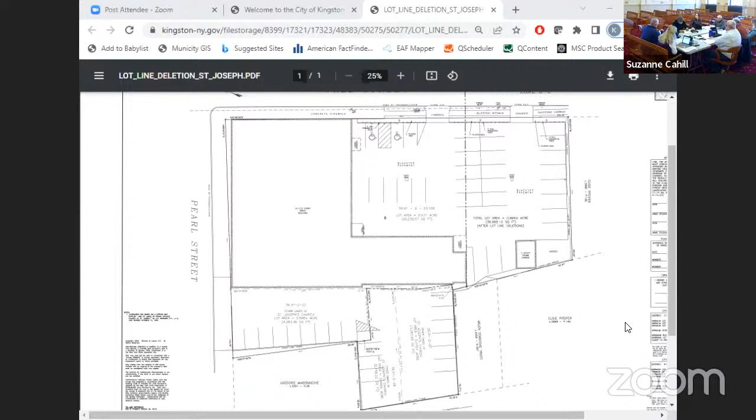All right, so under SEQR, this is a type 2 action, so no further review of the board is required. You've already been advised you got to provide copies plus the Mylar copy that has to be signed, right? Right. Anything else? That's it. Okay.

So, board policy 6 will be on it. Yes. So at this time, I'll make a motion that we approve item number 2 with board policy 6 and all of the copies and written descriptions submitted to staff. Second on that? Second by Chuck Palaco. All in favor? Aye. Aye. Opposed? Carried. Thank you, easy.

All right, thank you. Good seeing you again. It took you longer to get here, Phil. Well, I'll be back one more time.

In care of Centerline Communications is the applicant. Central Hudson is the owner of the pole. Anybody, we're going to introduce yourself? Kimberly from Centerline. So is anybody besides the applicant here to speak on item number 3? Can you just state your last name, please?

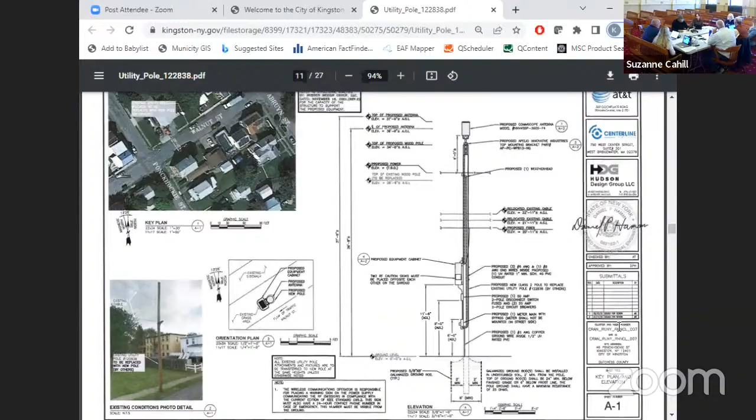Now, this says for AT&T - is this for all the cell phones, Verizon, all of them, or just AT&T? Just AT&T customers, correct. They just put one up on Delaware Avenue on the hill for Verizon, I believe. The main infrastructure of the towers is complete - it's now filling in the gaps or creating satisfying areas that are having high demand for data.

And that's where we're incorporating the small cell technology, which is just the small antennas to handle the offloading of data off the main antenna systems. And that's the pole they just put up a couple...

So it basically consists of a small antenna that sits on top of the utility pole. Then there's a small box, shown in the simulations, which takes care of the radios. Each small cell has a disconnect, so if utility work happens or the pole is hit, the cell signal can be turned off by anyone at the site. It's mounted at an appropriate height to not affect the surrounding community.

Any other questions from the board? We did provide simulations so the community can get used to what these look like when they start to see them.

So this is a short environmental assessment. It's just unlisted, we gotta do one. Yeah, I haven't had one of these in a while. We'll blow the dust off of this.

Under SEQR, this is an unlisted action, so we have a short environmental assessment form before us that is in order. At this time, I'll make a motion that we approve it. Do I have a second? Second by Emily Hamilton. We're gonna do a roll call.

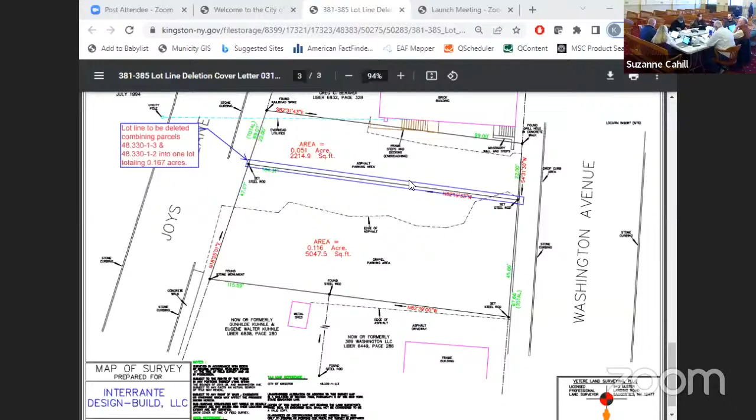At this time, I'll make a motion that we approve item number 5 with board policy 6 applied, and also the written descriptions and the appropriate amount of paper copies and Mylar copy to be submitted to staff. Second on that? Hamilton with a second. All in favor? Aye. Opposed? Carried.

You want to just, for item number 7? Yeah, I was wondering, I was gonna ask them. So we jumped to 7? That's an option. I'm sure that is 690? I don't think they're here yet. Okay, Jimmy Buff and Crystal Force, we'll keep you here. Right, that's good.

The folks from item number 6 are not here, the applicants. Is there anybody who wants to speak on item number 6 during the public hearing? It's number 693 Broadway. Okay, we're going to come back to that when they do arrive. I don't know if anyone was here for that.

Okay, moving into new business. Item number 7 is 381 and 385 Washington Avenue. It's a site plan for construction of a 6,768 square foot commercial building. Section block and lot is 48.330-1-3 and 2. SEQR determination, Zone C2, Ward 1. Interrante Development Group LLC is the applicant, 389 Washington LLC is the owner. Let the record show that Luke Interrante is here again.

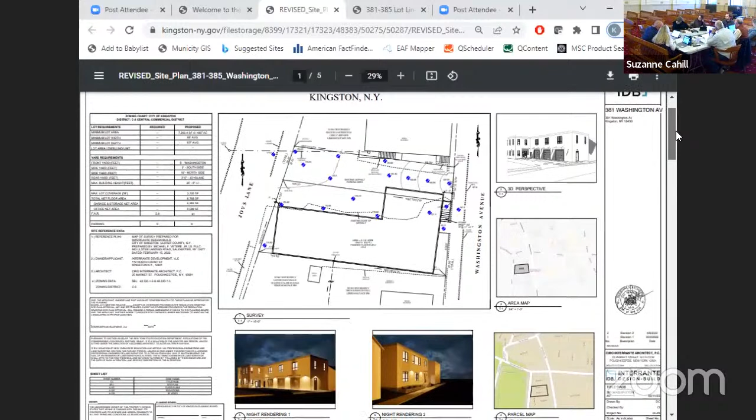Since the last meeting, we've done a few light updates to the plans, showing spot elevation and grading. We revised the signage, so we moved the no exit sign further to the west, so it's visible before somebody reaches Washington Avenue. We've added a no entry sign facing Washington Avenue along with some arrows on the pavement depicting that. Added street trees to the Joy's Lane side, two river birch in lieu of the boxwoods that were previously shown.

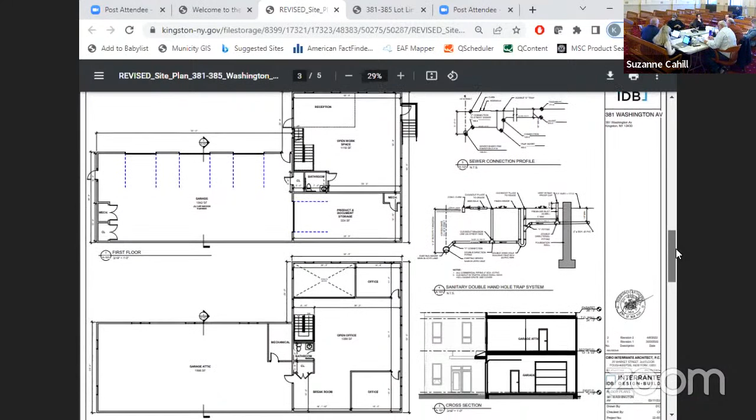Additional sewer connection and details to the site plan, stormwater calculations, and infrastructure to manage the stormwater was submitted to the city. John Schultes, the engineer, we don't have any comments back on that yet. I believe he's still reviewing it. And then most recently, we received the recommendation letter from the Ulster County Planning Board, providing a response earlier today that just outlines that we're in agreement basically with all of it.

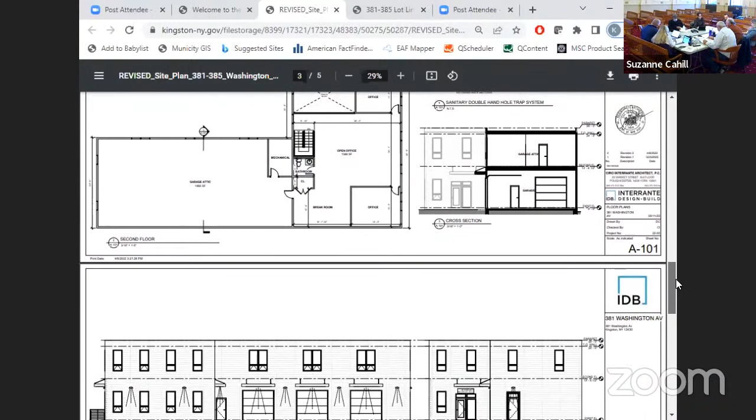We had some lighting spec for the wall packs we submitted with that response letter, and we're working on the photometric plan with a design lighting consultant, so we'll get that over. Some signage has been detailed. Sustainability was sort of the biggest item, so we'll make provisions for EV charging stations. We are changing the plan to go from all natural gas powered heating equipment to air source heat pumps on the office side, and then radiant natural gas tube heating in the garage area.

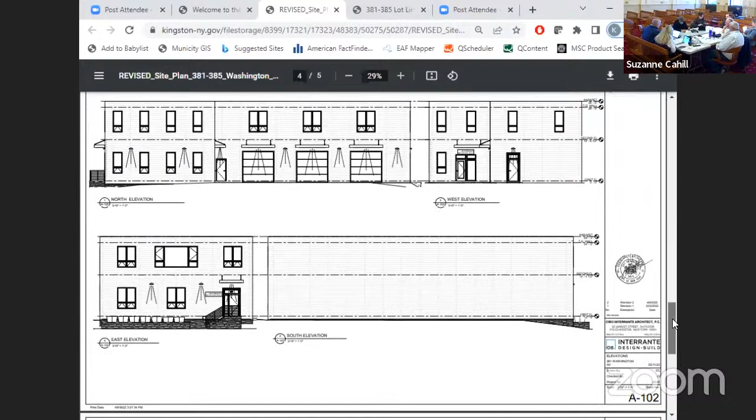Before we go into the few items that the county has identified for required modifications, can you just go over the traffic pattern again on ingress and egress? Yeah, so basically Joy's Lane entrance will be in and out. So if you look at SP1, you can see the two arrows indicating entry and exit on the Joy's Lane side right there. And then basically across from the handicap spot, we moved that signage, so there's an upright sign there letting folks know that there's no exit, that it's an entrance only off of Washington.

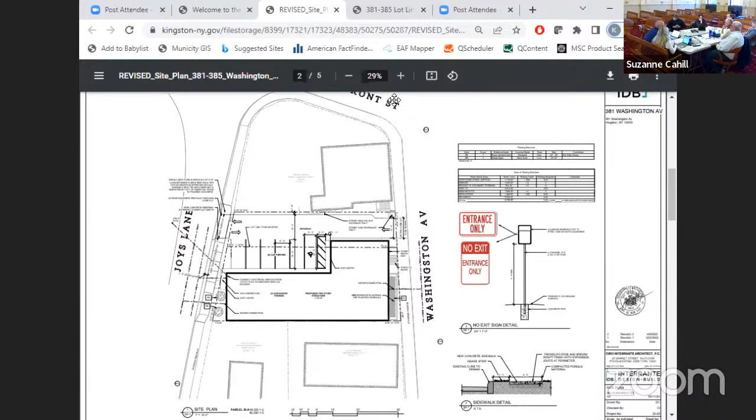Previously, that sign was closer to Washington Avenue, so the fear, Sue brought this up, was that somebody would already be driving down to Washington before they would see that sign. And then facing Washington Avenue, we have a no exit sign to let folks know that they can pull in and they don't have to wait to see if anybody's coming out, and also an arrow there showing that it's entrance only off Washington. So, same thing here too, so I'm not ignoring that. All right, so yeah, most of the traffic day to day will be in and out of Joys.

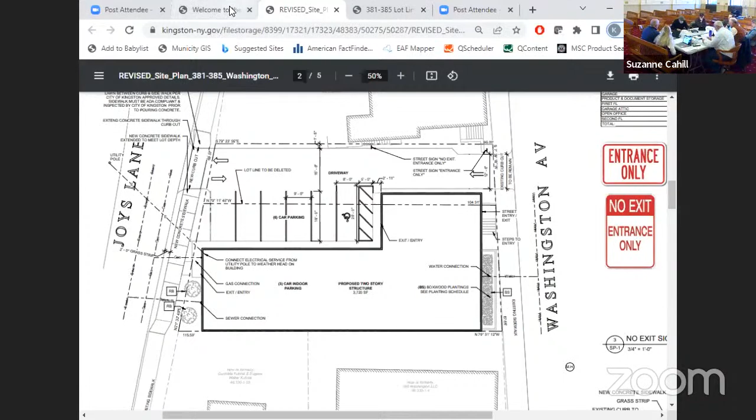All right, so some of the county responses here. The lighting, can you speak to that? Yeah, so the wall pack lighting, we identified wall packs on the elevation drawings already, although they weren't spec'd out. So that's the fixture that we're proposing to use, and our lighting consultant is working on a photometric. The county did give guidelines for that, so we're gonna make sure that we followed them.

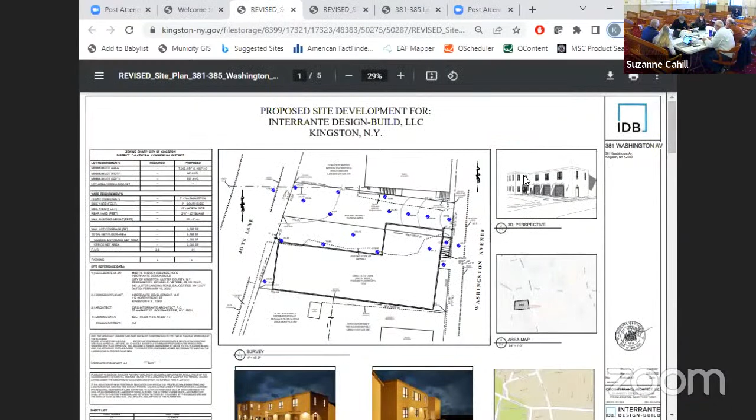Signage details were submitted. I'm just going by item by item here. Next page, there you go. Yep, I was also talking about the signage.

And sustainability, they brought up EV charging stations and wanting to have the infrastructure for those. So what we're going to do is basically rough those in to be built and mounted from the parking spots, so they can easily be added without having to redo anything. And those will be open to the public? Yes, standard. Those have been met.

Refuse removal? We don't expect to generate a lot of waste, so we plan to use the city receptacles. And does it come out to Washington on that side, or does that matter? I don't know where they pick up. Put it on Joys Lane side.

Yeah, we would use the Joys Lane side. Okay, schedule, yeah. So we got to take a vote. The only other concern that I had, Luke, was when I was thinking about it, the proximity to Washington Avenue with the construction. You may end up having to close off that sidewalk area during construction, so that will require a DPW permit.

So I would recommend strongly that you do some pre-survey of the existing conditions of the sidewalk, because if it gets damaged, you will be responsible for the repair and restoration. Understood. Yeah, it's actually a new section of sidewalk across the property on Washington Avenue. We're hoping to make our utility connections on Joys Lane, so we'll have minimal disturbance on Washington Avenue, but we are aware that we have to.

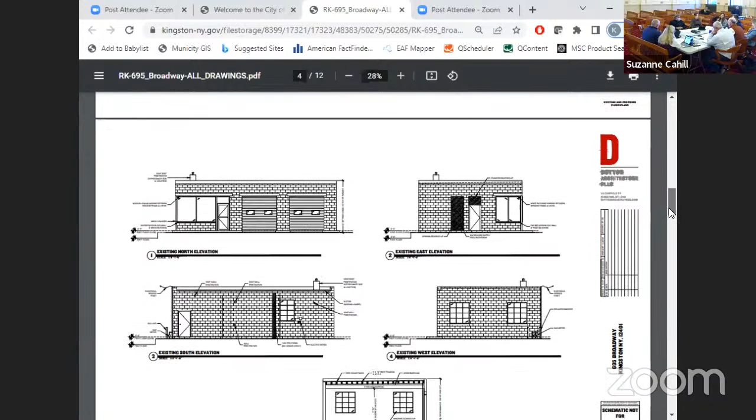Asia, maybe you just want to talk a little bit about the landscaping component in the front, because it's quite an extensive landscape plan for Broadway. It's unusual, a little different. Well, we're just hoping to make the community feel really welcome, be able to come in and use the space and have it really be an extension of the streets. We're going to be using sidewalks that match the Unilock that you've done on Broadway already.

So that it feels very cohesive with the city. It's a primarily native style planting, and we're trying to add some green space and help with more drainage in the city. There'll be a lot of permeability.

But the idea, just to explain to the board, is for it to be an area where people can sit and basically enjoy maybe music. It's a small event type space, open to the public, kind of a quasi-public space. Yes, and it's privately owned.

Anybody else need to see this? It's not much different than what was originally proposed, it's just now around the different design of the building a little bit.

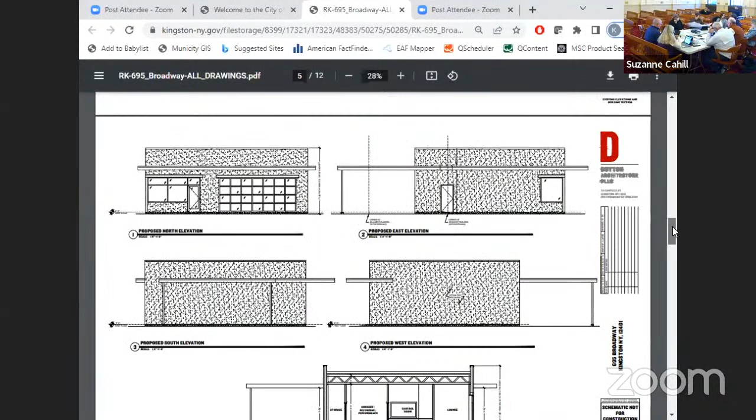Is there going to be any solar on site at all? There already is, both on 693 and on the annex building behind it.

Fruit trees, they'll be open for the public to come and pick the fruit, the raspberry and the peach, and blueberries along the front. Absolutely, great food.

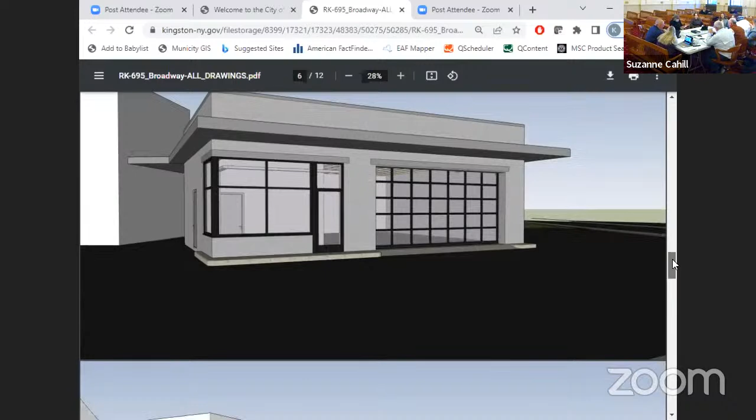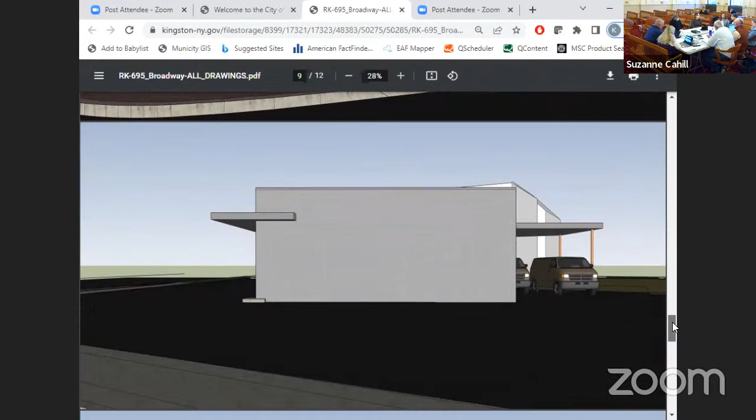Is it going to be offered to the public? There may be speakers, there may be presentations, it might be used for another organization to host a meeting. It's designed to be that.

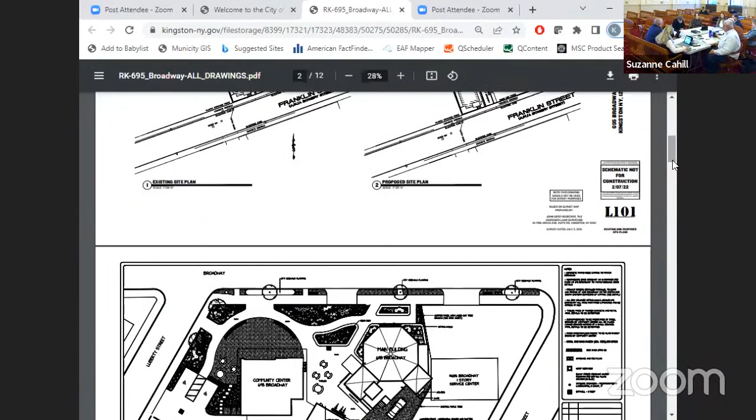Has the generator already been installed? Yeah, it kept us moving during the storm. Any problem with noise washing over to the neighbors at all? No complaints, no. It's remarkably quiet for the size that it is, the generator.

And refuse and recycling, where's that going to be stored? It's currently stored behind 693 to the lower right, behind that building where the driveway and the car are, and we wheel it out every Tuesday morning. So you do have a spot for it. Yep. So I guess no dumpster, right, you're just wheeling that stuff out. Yeah.

So did they already have a term with the previous submission? I don't know, but I think we'll just discuss it since this is new construction. We're going to talk about the term for the special permit. We'll see how the board feels, but typically we set a year for the first term, see how things go when construction's all done, and come back for renewal if everything's good, which I'm sure it will be.

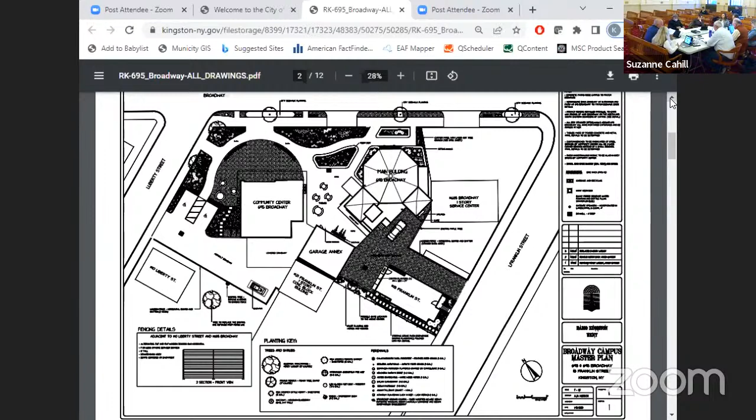So this is type 2, huh? Yep, under SEQR. So because of the square footage, no further review of the board is required for that. At this time, I'll make a motion that we approve item number 6 for a period of one year with board policies 4, 4A, 6, 10, 11, 14, 19, 23, 25, and 26. And what's this one here? That's if they do hold special events, they need to get special permits for the noise. If you have special events there, you're going to have to secure a noise permit from the planning office.

So that's all on the motion. Do I have a second? A second by Kevin Roach. All in favor? Aye. Opposed? Carried. Thank you, folks, thank you.

All right, item number 4, they're still not here.

Okay, item number 8 is 86 Smith Avenue, site plan to install signage overhanging the public right of way. Section, block and lot is 48.82-1-8, SEQR determination, zone C3, Ward 5, Bethany Obrecht, correct? All right, is the applicant owner? Welcome, thank you very much for having me. Bethany is here.

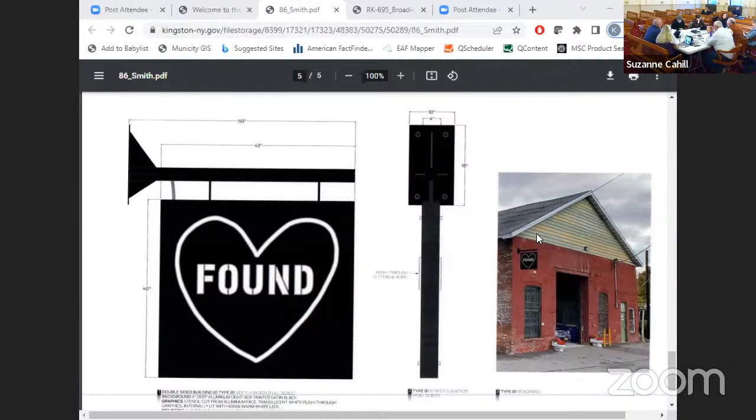All right, any other questions from the board? Under SEQR, this is a type 2 action, so no further review of the board is required. So at this time, I'll make a motion that we approve item number 8 with board policy 6. Do I have a second? Second by Vince Archer. All in favor? Aye. Opposed? Carried. Good luck. Thank you, I appreciate it.

That is so good to be in person again, isn't it? I think it's easier. Yeah, I'm sorry.

All right, moving into old business. Is Dago here? No, he is not. Let's go. Item number 9 is 685 Broadway, special permit renewal for auto sales and repairs. Section block and lot is 56.92-3-21, SEQR determination zone C2, Heritage area, Broadway overlay district, Ward 4. Dago A. Maratz is the applicant owner. Mr. Maratz is not here.

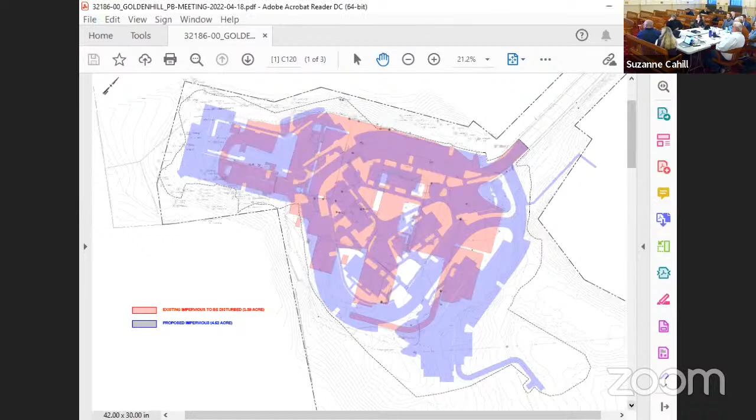So if you go to the next figure, we broke the site down into 6 different design points, keeping the existing design points the same as proposed of where water currently flows and where it's going to continue.

We'll start with design point 1, to the north towards the nursing home. Our design point is an existing catch basin located near the rear parking of the nursing home. Water from the jail currently gets there via an existing drainage manhole at the edge of the parking, so the jail and majority of the parking goes to that catch basin and down the hill towards the nursing home.

The nursing home has its own closed stormwater facility network that goes throughout its parking and continues in a sewer network down Gum Street. The green area, the senior building, the majority of the loop road, and the townhouses will connect to that existing structure on our site that continues down to the nursing home.

The townhouses in the center, we're going to capture the water from the roof and send it to stormwater planters, where it will be treated before going into the closed system. The senior building and roads will be captured through catch basins and the pipe network, treated with a hydrodynamic unit before going into that.

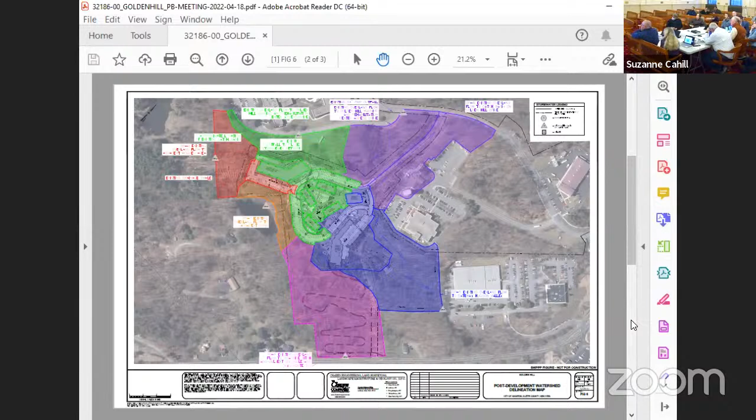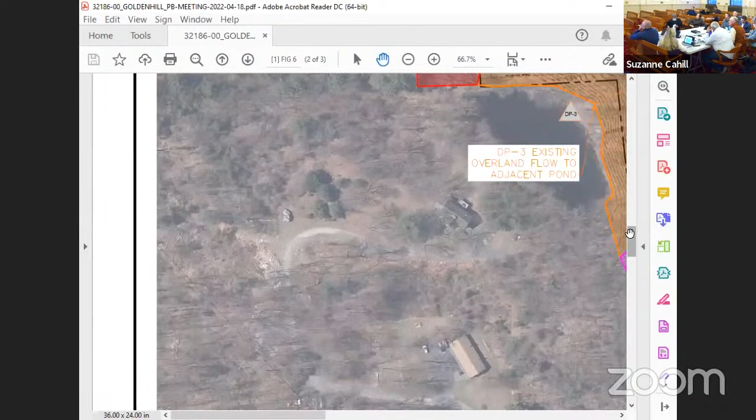So how would all of these systems handle it? The DEC requires us to examine the 1-year, 10-year, and 100-year events, and the city, as an MS4, requires us to also analyze the 25-year event. This is an excerpt from our SWPPP report, and for all sources, we reduce the flow rates.

That's a separate network. We're sending it to a closed network that flows through the parking lot of the nursing home and then continues down. The proposed system will actually be better than what exists.

Any questions about the stormwater? Okay.

You've done some borings - that's all been completed, right? We submitted a geotechnical report with the boring map for you guys, I believe, after the last meeting.

I don't know if you're prepared to answer the question - is blasting going to be needed up there? I can't say specifically at this point. What we can tell you is that we designed the site to limit the need for it. And if it is needed, we will follow the existing city ordinances and to the extent possible use mechanical demolition instead of blasting. That's what we can tell you at this point.

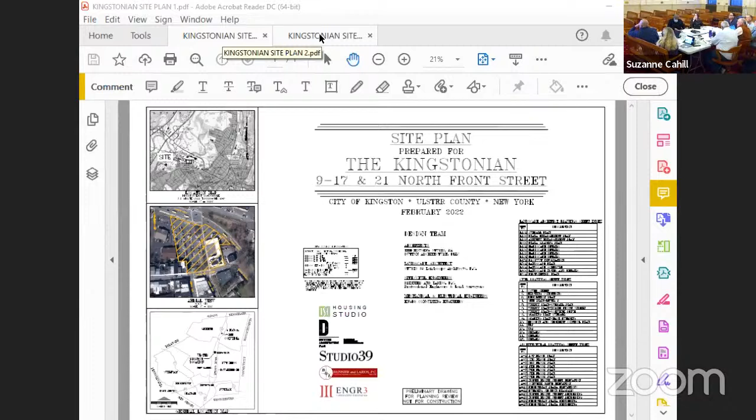And as you all know, it's substantially developed already, so this is redevelopment. Strong. Next one.

This is a rendering, I think it's the sheet in your drawing, of the project from the corner. It's around from the Senate House and the Senate garage, showing for now the Herzog warehouse, the masonry building. And this shows what I call the West Campus, which is the building over the parking garage and Montgomery real estate.

That's a version. This is the pedestrian plaza entrance, and that's the main West Campus building frontage along North Front Street. Over on this corner would be an entrance from the Wall Street and North Front Street intersection to the garage, entrance only. That's directly across from where it lines up right with Wall Street.

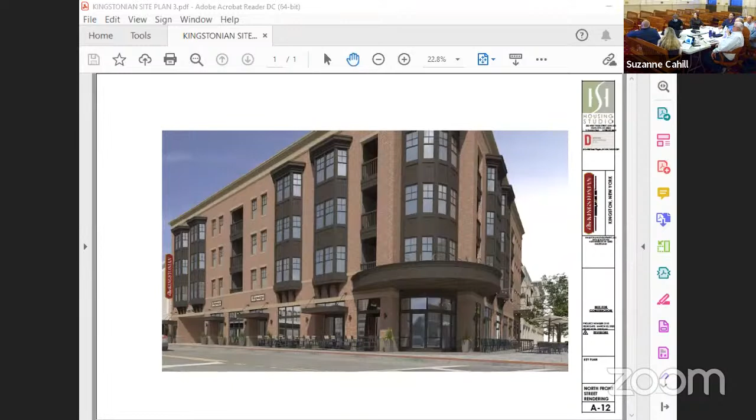It's slightly different from the garage entrance to the city garage. Yeah, that was offset a little.

This shows the elevation looking up North Front Street to the building, West Campus, East Campus. This is the hotel with ground floor space and a restaurant. This is retail space here and apartments above. These are the hotel rooms.

The applicant and the architectural team spent a lot of time with HLPC advancing these drawings based on public comment. We've actually, over the past...

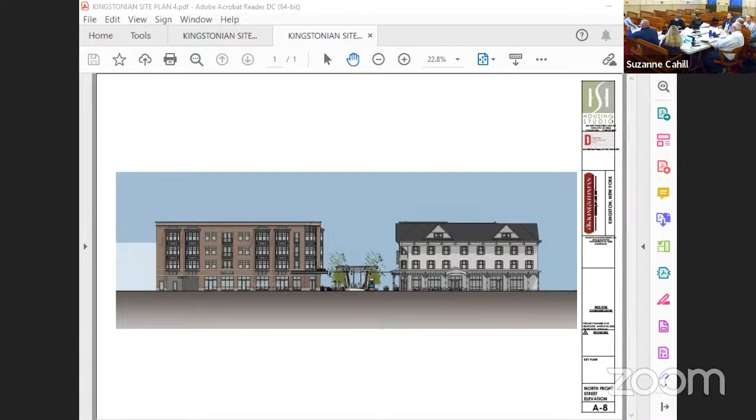Five is giving me an error message. Five is probably the next sheet. From Schwenk Drive, looking at the back, what we call the back of the project. So that's on your end. This is on my folder at six.

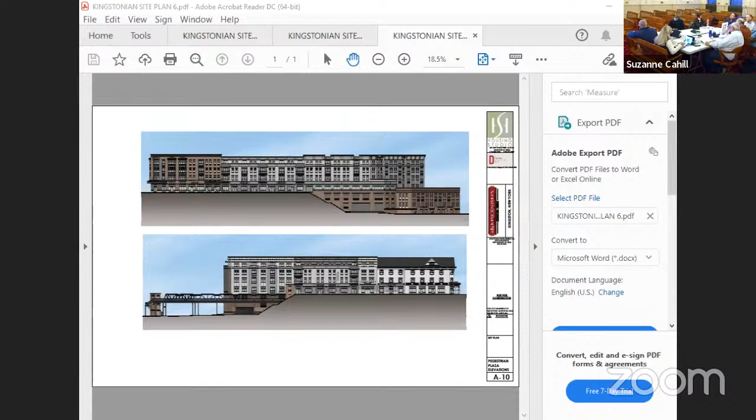And this is slices through basically the pedestrian area between east and west. This would be looking at the plaza view, looking at the elevation that faces the pedestrian plaza.

One addition, which I'll show you in plan view - one addition or enhancement was this project: the pedestrian plaza used to end at a retaining wall with a safety gate, so people could walk to the end of the pedestrian plaza, but that was it. So the new design team has introduced a grand stairway down to Schwenk Drive level.

So it could also be used for events. And that's presented in more detail on the landscape plan. So that's one project enhancement that's been made.

Also, even along the side of that, at the request of some bicycle enthusiasts, a runnel - a bicycle runnel has been added, so you can walk down the steps, roll your bicycle down the runnel, and get to the lower level.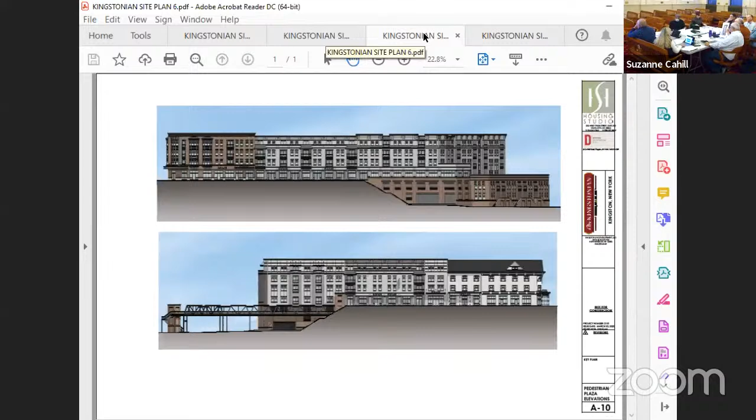Walking towards where the entrance to the pedestrian bridge would be. This is a part of the treatment of the pedestrian plaza. This is kind of the north end of the pedestrian plaza.

This shows the treatment of the buildings facing the plaza. Again, mostly retail space on the ground level and apartments above. And these give the more representation of what the colors are going to be. I know this, it's difficult to match the two up.

This is going to be - yes, really this is what was endorsed by the HLPC, the Historic Landmarks Preservation Commission.

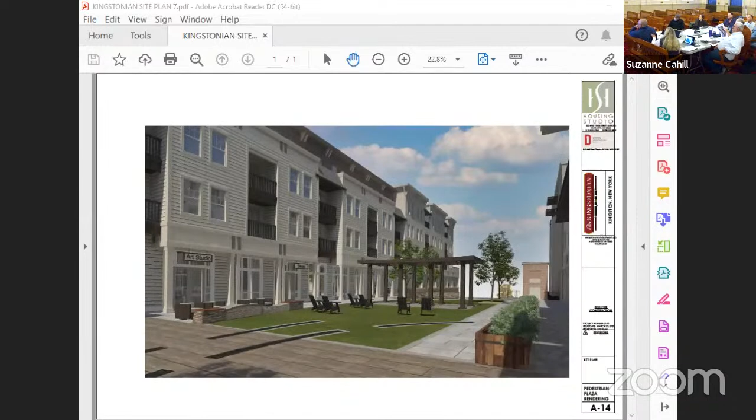This is looking at the pedestrian plaza looking out towards North Front. This will be including a kiosk that was requested by SHPO, the State Historic Preservation Office.

And this is the treatment and gardens, and this is the hotel area.

And that plaza has evolved in the course of this whole project - it used to, at one time, be a covered entrance. Part of it was, yeah, part of it was. And there was at one time a bridge which went over it. Yeah, and I mean, how it evolved with this.

There's a lot of... So you've seen, this is the south there, you saw the north there. And this slide is showing...

The main gathering space, and there's a trellis and a stage, a small stage for musicians to play. And there will be, important, off of this pedestrian plaza, there will be public restrooms. I think all of you probably know there are no public restrooms uptown.

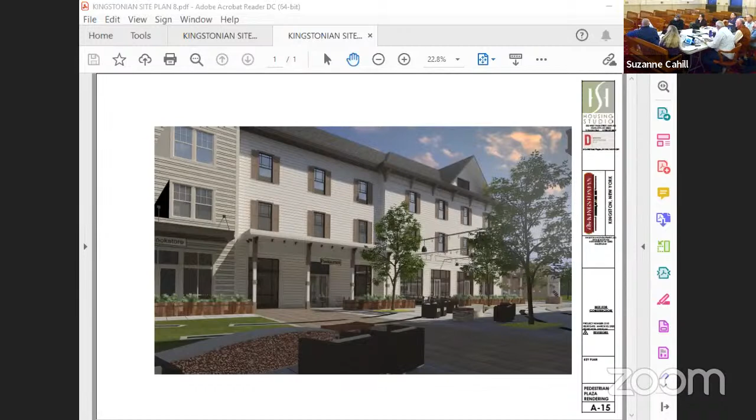Some of you might ask, this design team spent a lot of time on this. How are you going to manage solid waste in this facility? So we had to go through that, where chutes would be and where they'd come down into the garage, how they get wheeled out, and how recyclables will be collected. All that has gone into the planning as we get into the nitty-gritty details.

But this is the staircase. This is the pedestrian plaza, which plans I'll show you in detail. This is the entrance into the garage off of Schwenk Drive, and then we'll exit out either side as well, and then you have the one entrance off of the front.

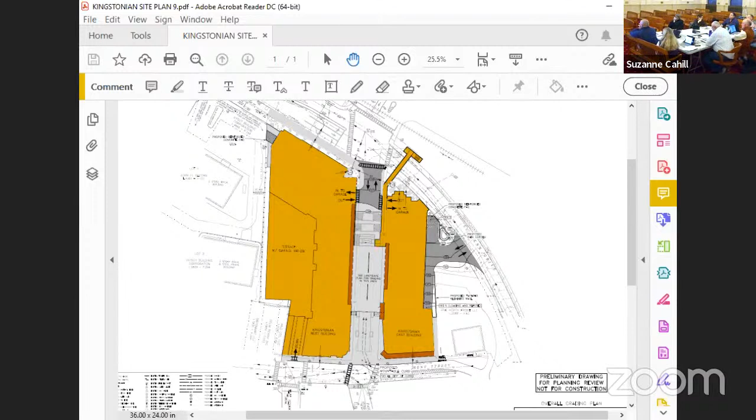This will be your main delivery corridor here, for deliveries to the restaurant, to the facility, and also for pickup, wheeled out in small carts on collection day. There will also be a smaller one here for that.

There'll be an entrance here just for move-ins. Someone's moving into an apartment, they can pull in, drop their stuff inside the garage and right into an elevator to take it up to their apartment.

On the fourth floor, which is street level on our front, although you won't see it from the street, there's an activity deck that will include recreational elements, a small swimming pool, barbecue areas, those kind of amenities for the apartment dwellers.

Also, one other enhancement or change is originally there was a dog park proposed over here that just didn't fit once we figured out deliveries and how to get refuse collection in and out without bottling up the city streets. So the dog park has been moved to one of the roofs of the project, on artificial turf, and a washed-out system.

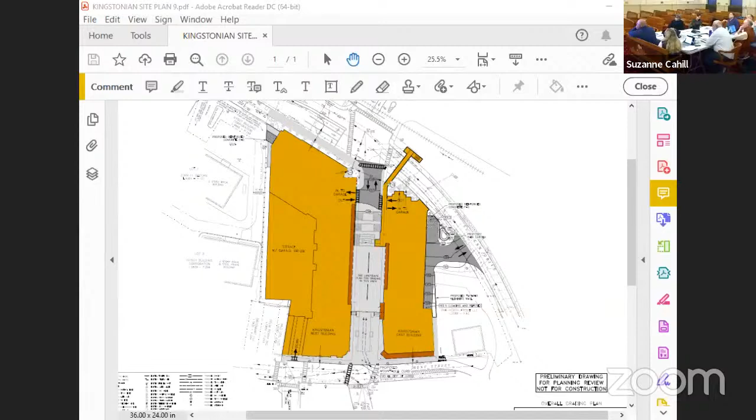How's the landscaping? It was the Uptown Transportation Board that did a project with the landscaping along Schwenk Drive. Did you tie into that somehow? Yes, we've been meeting with their design team.

Our project starts at this intersection, it goes out to Washington Avenue. We've been coordinating, because they had a bunch of different alternatives they were looking at. We just gave them our plans and said, here's what we need, we just need an entrance in and an exit out, and we need to cross.

We moved, that's the other enhancement I consider, is this pedestrian bridge used to sit right here, and we moved it easterly about 70 feet.

Did it just look better that way? It looks a lot better, it's shorter, it's less obtrusive, and doesn't conflict with the railroad or overhead power lines or anything, it just falls very nicely.

Just along the sidewalk of Schwenk Drive, which is on the Kingston Plaza side, there's an extensive landscape treatment along this part of Schwenk Drive, where the building sits, just short of the sidewalk. You can see in the landscape.

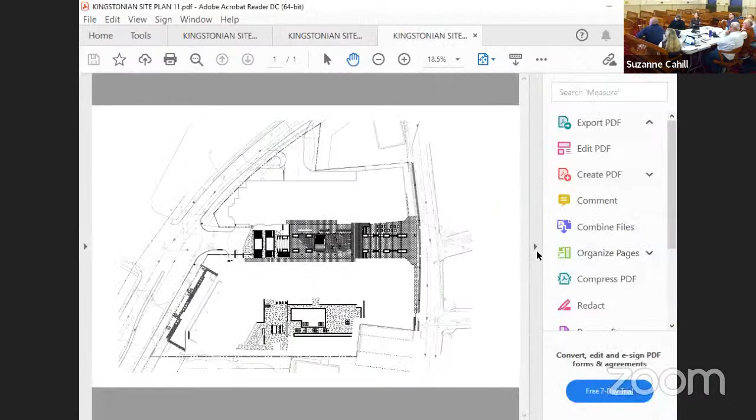Next slide. Yeah, this is the overall landscape plan. I think you skipped one. Go back one.

This is the overall landscape plan. It gives a broad scale showing the whole project. Each area denoted here in the box will be blown up in a lot more detail in the landscape architectural plans that are really at a construction level that are being presented. This shows the pedestrian plaza, the grand stairwell, all the peripheral landscape treatments that are provided for the project.

All of these drawings have also been uploaded to the website, so I would encourage the board members to go on and really look at them. There's a formal presentation at the next meeting where we'll go through each one, hoping to have colorized landscape. Right now these are black and white.

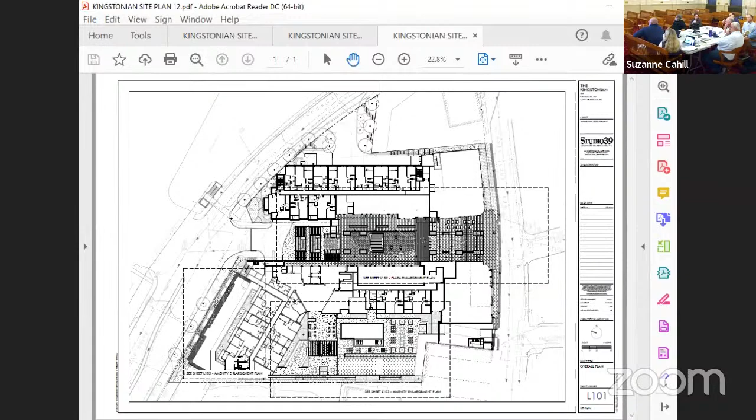That's 101. Try another slide. L102, that's showing the pedestrian plaza in a lot of detail.

Bicycle runnels right here that I was talking about, the grand stairwell, the center landscape areas. This is where a small stage would be.

A lot of this is in stone, but some of it is artificial turf to break it up. Some of the shading area is basically in an artificial turf material. These are all planters, and the color will help us a lot.

Treatment along North Front Street would remain as a bluestone sidewalk with brick trim, as it currently is. For those familiar with Uptown, you'll notice that in front of the warehouse, that bluestone had been paved over at some point with blacktop. In front of the old parking garage here, it's still in pretty decent shape. The whole frontage will be treated with a bluestone brick mixture, and then there'll be a transition into the pedestrian plaza.

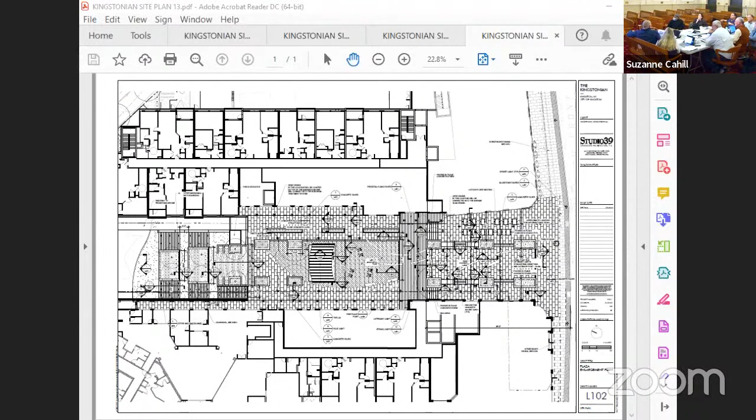I believe that they looked at other buildings that were constructed in Uptown, that are historic in nature, but not the Revolutionary War buildings - subsequent buildings - and trying to pay tribute to those by taking certain features.

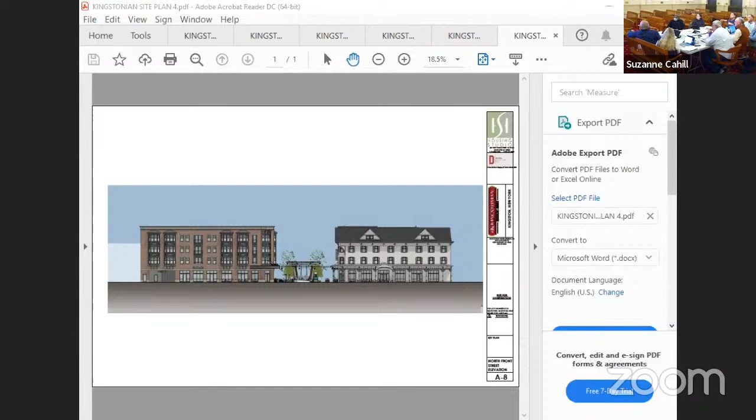And just so you know, there are delivery drop-off zones in front of the Senate garage across, and besides deliveries in the back, if a UPS truck pulls up, there'll be a mail room just inside the plaza - a mail and box room where things can be delivered there, without blocking a lane of traffic like happens at the other end of the road.

I think though they made a little area there by the Senate garage for designated delivery areas. There's also a delivery zone on Fair Street near the stockade - there's 2 or 3 spaces that are designated for that.

And there was discussion with the city and the developer about a fee schedule for the parking? Is that finalized? The deal is we're going to charge what they're charging on the hourly meter parking, and the monthly one will be different because the city's... It hasn't been finalized, but from the get-go we said it was $1.50 an hour or something, I'm not sure exactly, but that was part of the discussion too. It would follow suit charging folks like the other public lots in the Uptown piece.

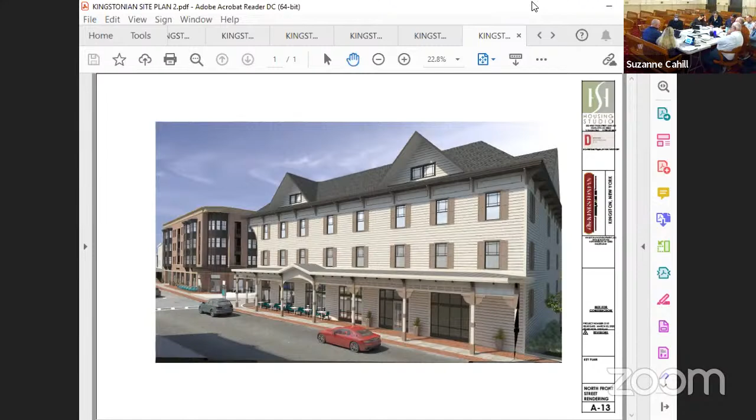Well, I don't know, Mike, do you or Brad have anything else you want to add tonight, or speak to, waiting to hear back from you guys? We're excited, willing to work with you and ready for the input.

I think maybe one thing you could talk about is that you've brought in another partner since the original application was made. If you want to talk about that for a few minutes.

He's working with us, and he's going to help build it and finance it with us. They have expertise throughout, as I said, the whole eastern seaboard really. It's a very complicated project, I think everybody understands that — the geotechnical stuff we had to do recently. So we kind of needed that added expertise. Scott felt he needed that side too.

The other thing I'd mention, because it came up during environmental review, is about energy. The city adopted what's called the stretch code. The state adopted a much stricter energy code for 2020, but the city adopted the stretch code, which is stricter yet. The complication is that not many designers have worked with the stretch code in the United States — it's coming over from Europe — and the reviewers, the code people, the building departments, etc., are having to get up to speed with it. But the design team is dealing with the stretch code right now, with the thermal envelope and all the other requirements in that code.